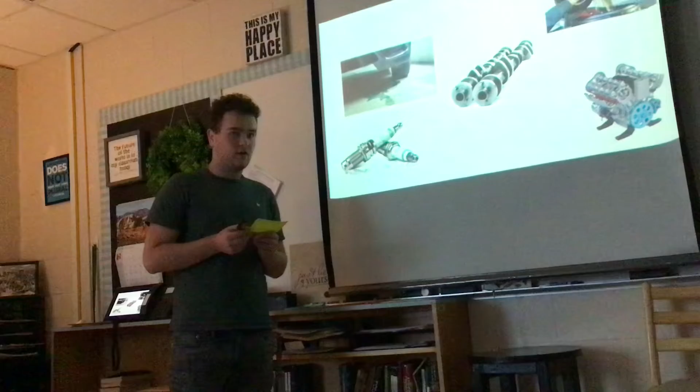This is just the tip of the iceberg of what you might hear from your mechanic telling you what parts they ordered, what's wrong with the car, and the maintenance they did. This is where you'll find yourself probably nodding your head and agreeing to what they're saying. In this speech, I'm going to help you understand what they're telling you. We're going to talk about one part of the car that most of you should know, the engine.

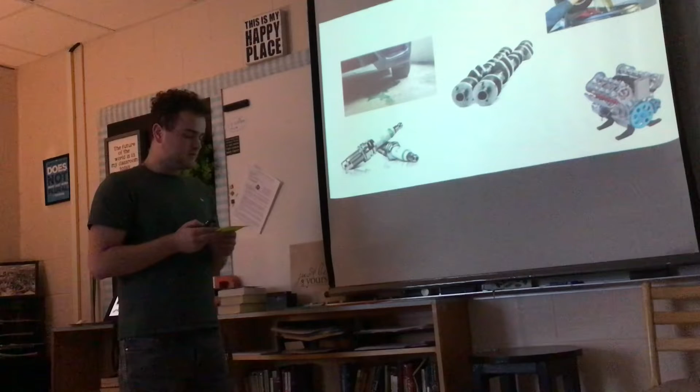Quote, there are many parts in a modern engine, each essential to the engine's operation, end quote. Well, how does an engine work? During my speech, I'll inform you on some terms you'll need to know, how two of the most common engines work, and I'll also talk about the purpose of the coolant and lubrication systems.

So, terms. I'll be showing you some terms that I'll be using in my speech. These terms will help you understand the concept of the internal combustion engine.

Internal combustion engine. Quote, internal combustion means burning within. Engine refers to the device in which the fuel is burned, end quote.

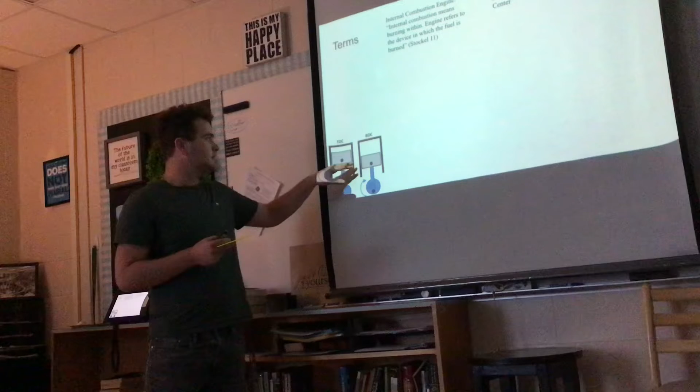TDC and BDC. TDC is top dead center, when the piston is all the way at the top, the highest part of the cylinder, and BDC is bottom dead center, when the piston is at the bottom part of the cylinder.

Camshaft. A camshaft is what activates the cylinder's intake and exhaust valves. A valve is what opens and closes to allow fuel-air mixture into the cylinder or to let out exhaust fumes from the cylinder when the fuel-air mixture is burned.

Spark plug. A spark plug is what ignites the air-fuel mixture. A piston is a moving disc enclosed in the cylinder, which is made gas-tight by piston rings. A cylinder is what houses the pistons.

Now we move on to how the engines operate. The reason I'm showing you this is because you need to know the basic operation of your engine and what's responsible for the adrenaline when you step on that gas pedal.

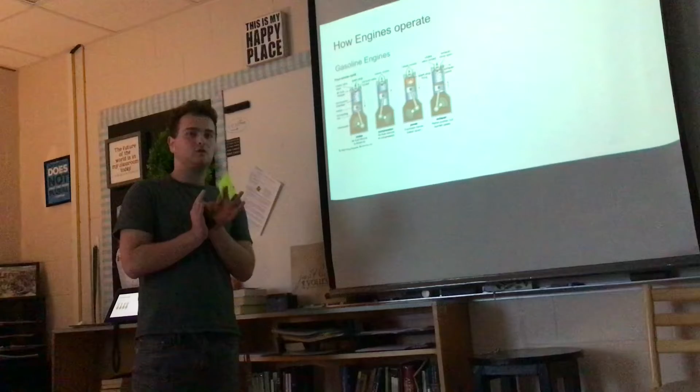Gasoline engines. They come in many configurations and sizes, ranging from 1 piston to maybe 32 pistons. They come in the V form, the W form, or a flat 4, but that's for a different day. So, the 4-stroke of a gasoline engine, or the Otto cycle.

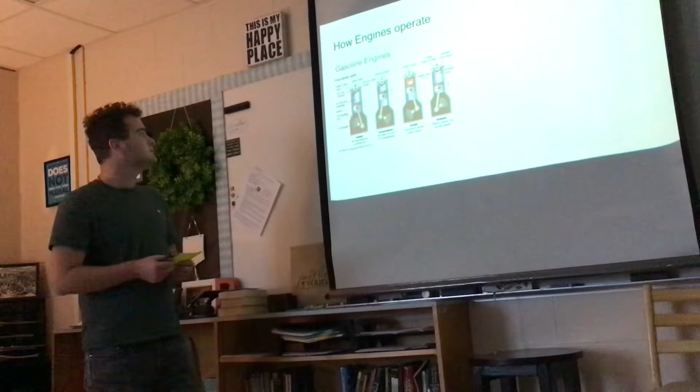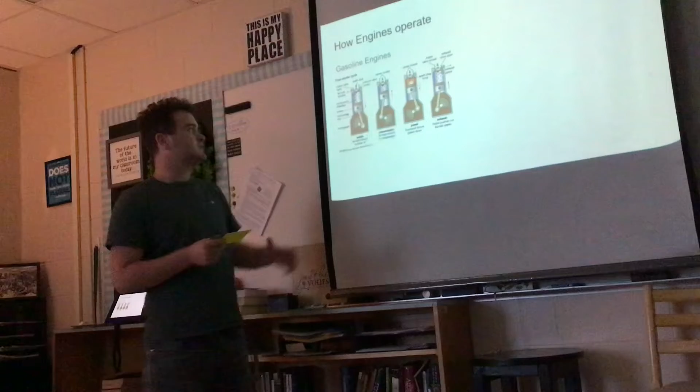How this works is the intake, compression, power, and exhaust. For the intake, the piston is going down and the intake valve is open, letting in the air-fuel mixture. This leads to compression, when the piston goes back up to compress the air-fuel mixture, which makes the temperature hotter and more likely to spark.

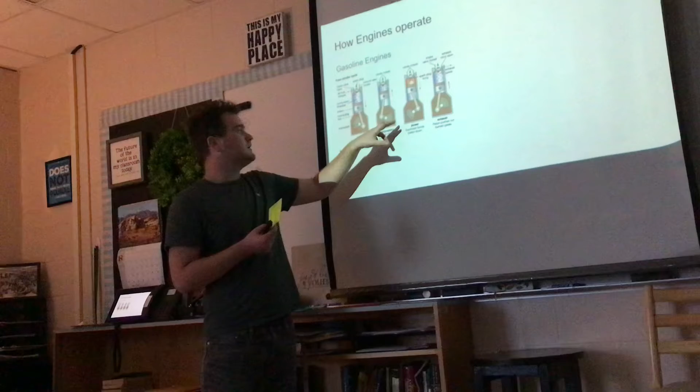It then goes to the power stroke, where the spark plug, which we discussed, ignites the fuel mixture, making power and sending down the piston. Since the gasoline makes fumes, it needs to get out somehow. So then the piston goes back up for the last stroke, which sends the exhaust fumes through an open exhaust valve, which sends it to the exhaust port.

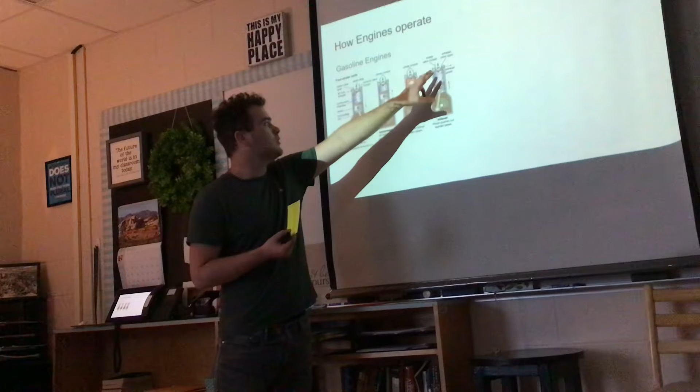And this process repeats while your engine is running.

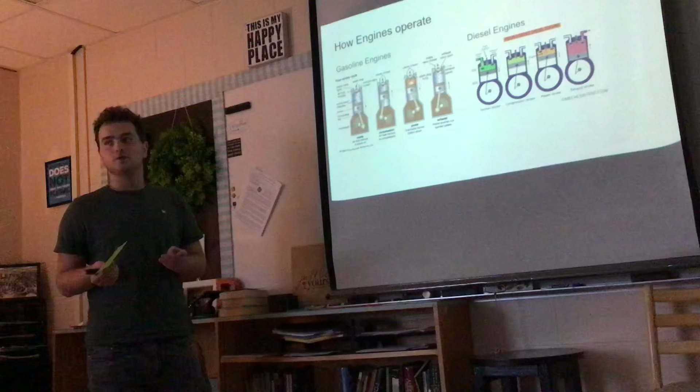Diesel engine. There are many diesel engines, and gasoline engines and diesel engines are pretty similar. They run on the same 4-stroke operation, but there are some differences. Well, there's the fuel. Diesel engines run on diesel. It's much different than gasoline because they require no spark plugs to ignite the mixture.

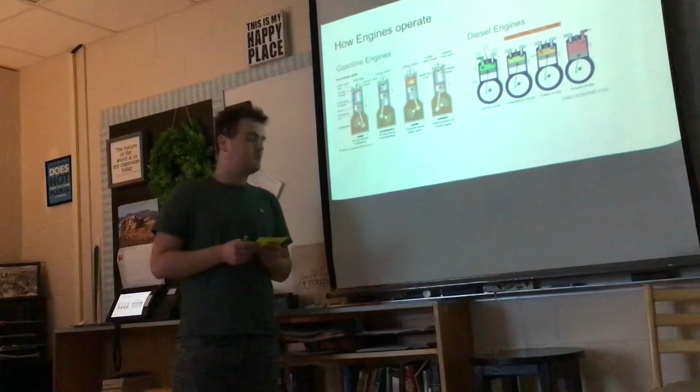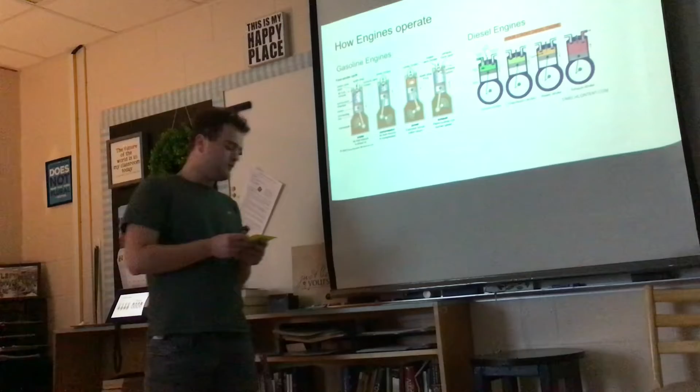Okay, so the 4 strokes of a diesel engine. The first one is a suction stroke, the second is compression, the third is power, and the fourth is exhaust. The suction stroke is a little different from a gasoline engine.

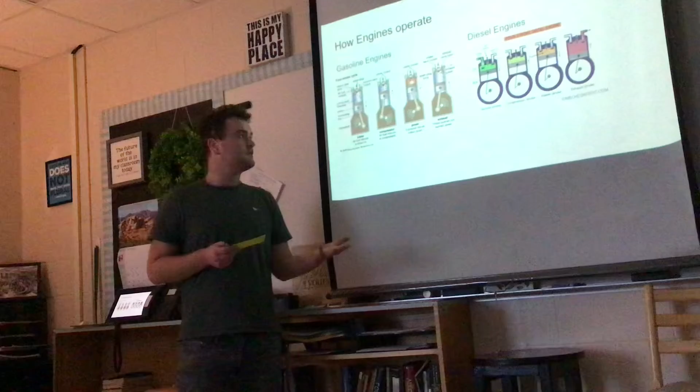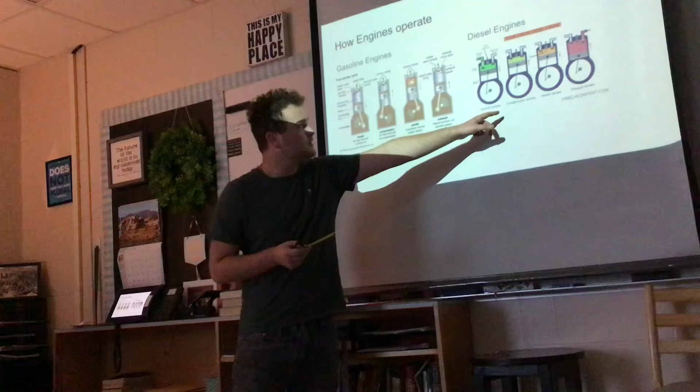Instead of an air-fuel mixture coming in, it just lets in air because the piston is going down. Then it goes to the compression stroke, which compresses the air up to 1,000 degrees Fahrenheit. That's enough for the fuel to ignite.

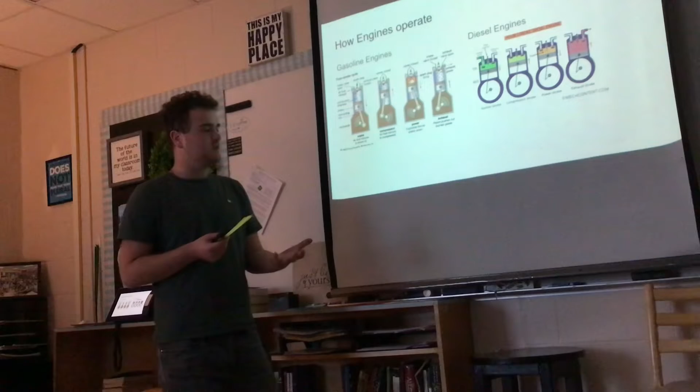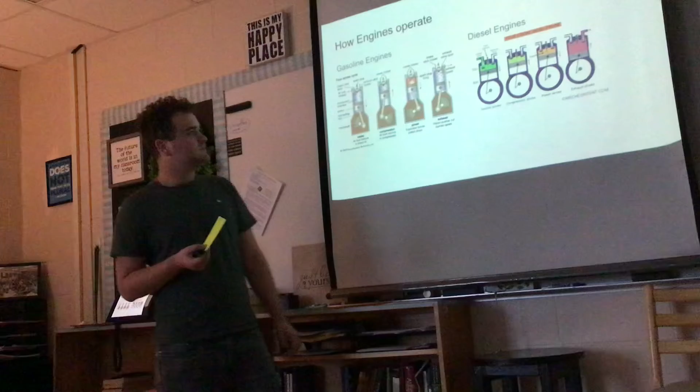So for the power stroke, fuel is then injected into the cylinder, which ignites on touch with the air mixture and sends the piston down. Then, as usual, the exhaust stroke occurs, where it goes back up to let out the exhaust fumes through the exhaust port. This process repeats the same as the gasoline engine.

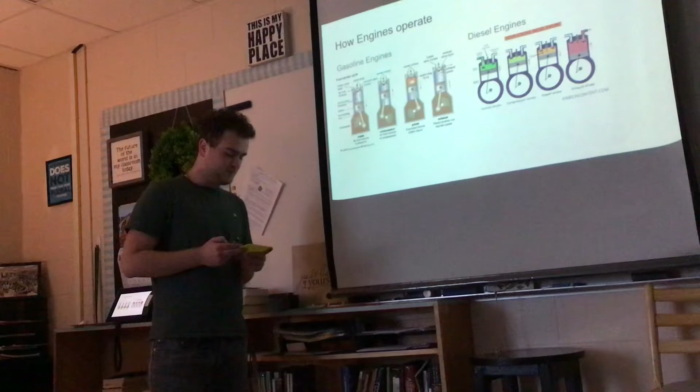Okay, coolant and lubrication systems. I'll be telling you about why these systems are necessary for an engine, and why you'll find yourself getting them changed every so often at the mechanic.

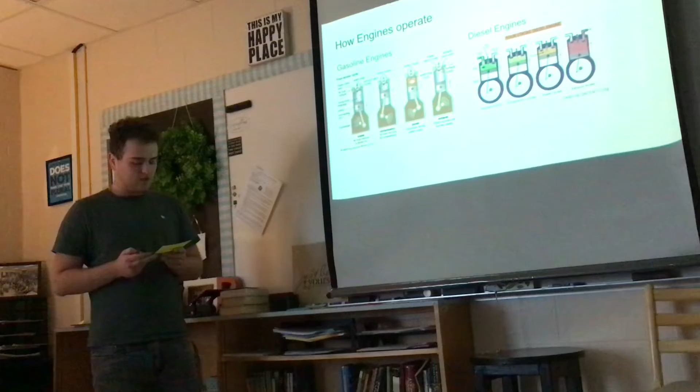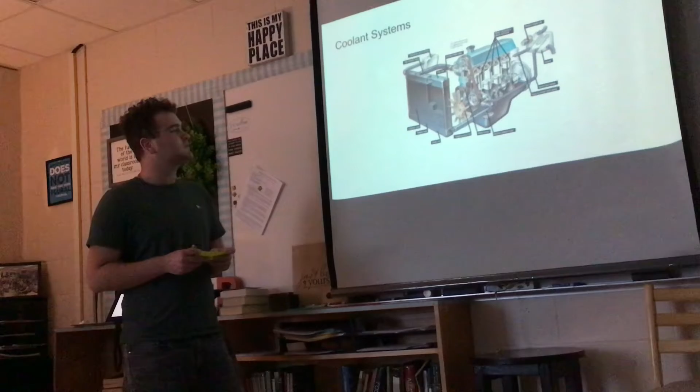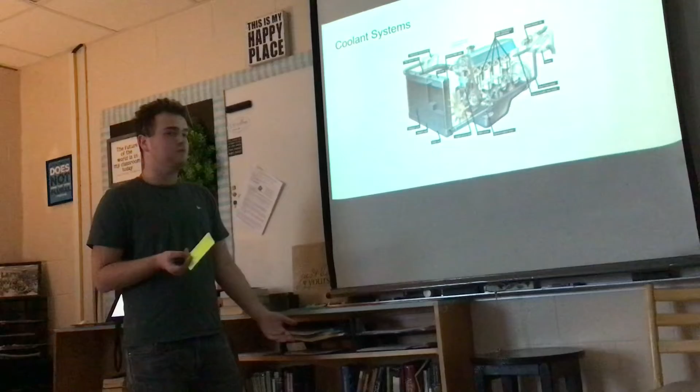Coolant system - why do you need it? The reason you need a coolant system is because the engine produces a lot of heat from internal combustion. 1/3 of the heat that is produced is used for power. The rest is just excess heat. And if you do not have a coolant system, the engine will wear down very quickly.

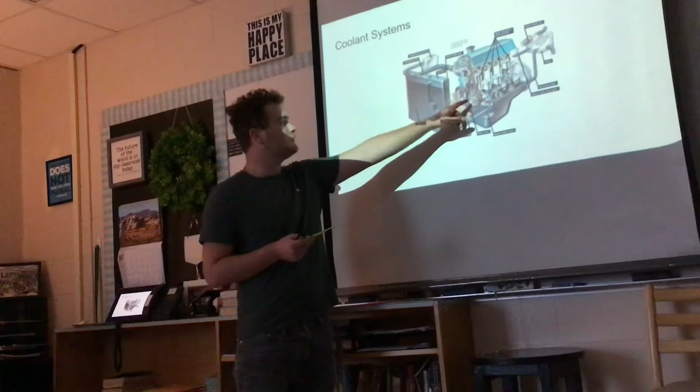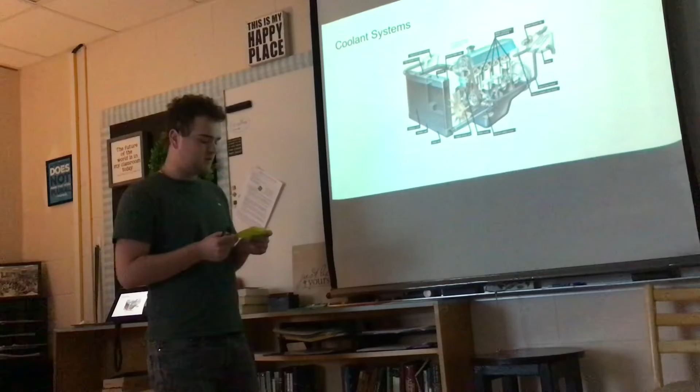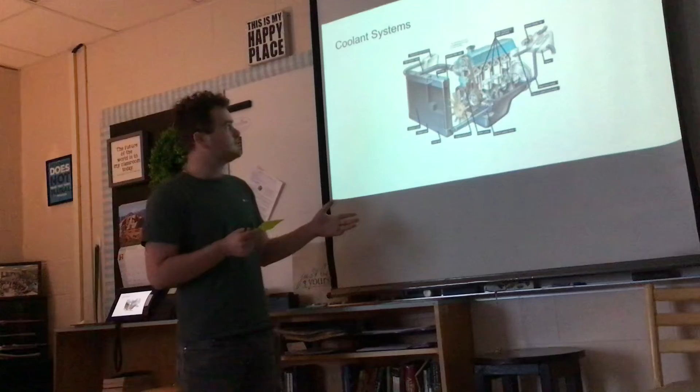There is a water pump connected to the belt that the engine runs, which sends coolant through passages of the cylinder block to cool it down. When the coolant gets hot enough, it is sent to the radiator to release the heat and cool down the coolant. Then the coolant is sent back to either where it's stored or back to the engine. This process keeps repeating throughout the engine's running.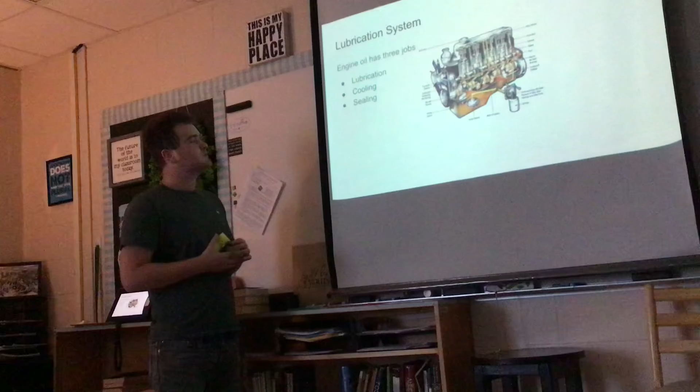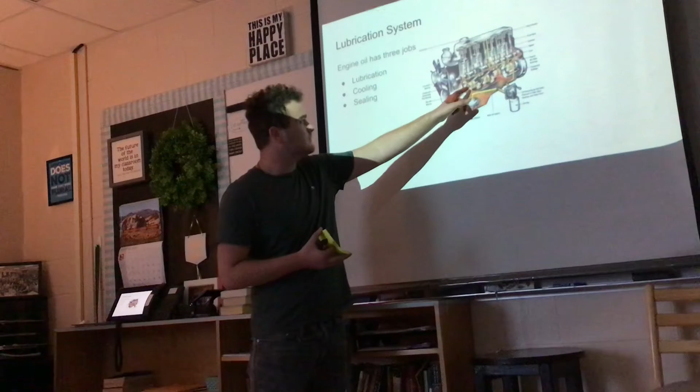There are two other jobs for the lubrication system: cooling and sealing. Like the coolant system, the lubrication system also does some cooling. The oil that is sent through different passages in the cylinder block is also hit by the piston going down, which splashes the oil onto the cylinder, cooling down more engine parts.

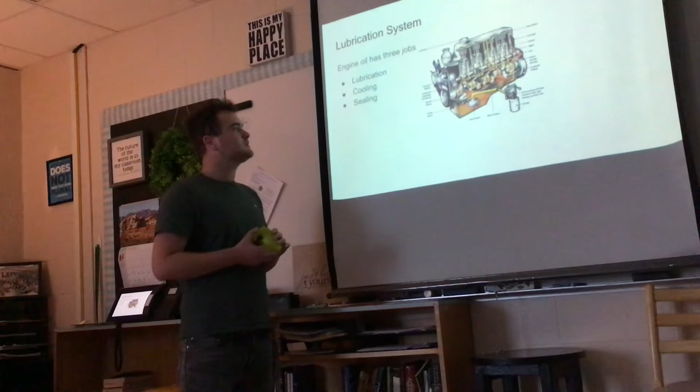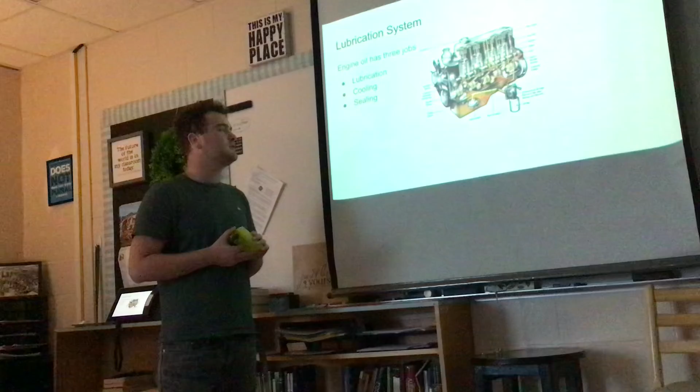It also seals. No matter how airtight the piston rings are on the piston, there's always a possibility that the air-fuel mixture will be let out. So oil is the next product to be the sealant.

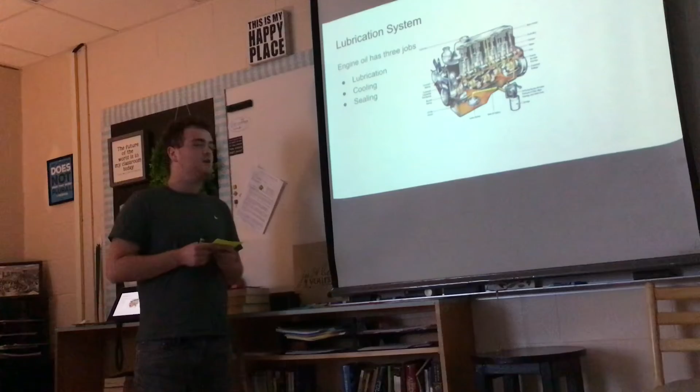Oil and coolant have to be changed several times a year - oil way more than coolant - because they collect dust, carbon, and sludge, which can affect the engine's performance. And if you don't change them, like if you don't change them in 2 years, your engine might blow up. It's a possibility.

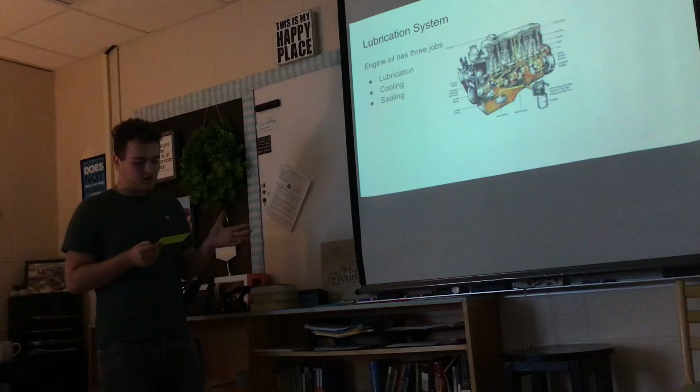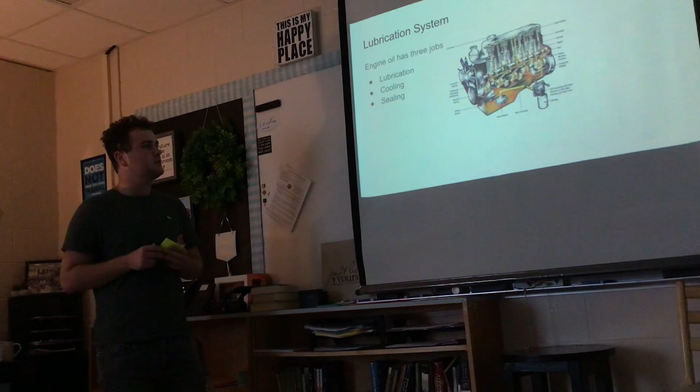And so now that you know how an engine works, and how these two systems work, you now know what pushes you from 0 to 60 miles per hour in seconds. However, this is only a simple engine - engines are much more complicated today. Hopefully you now know what the mechanic is telling you when you get your car fixed or maintained. Thank you for listening to my speech.